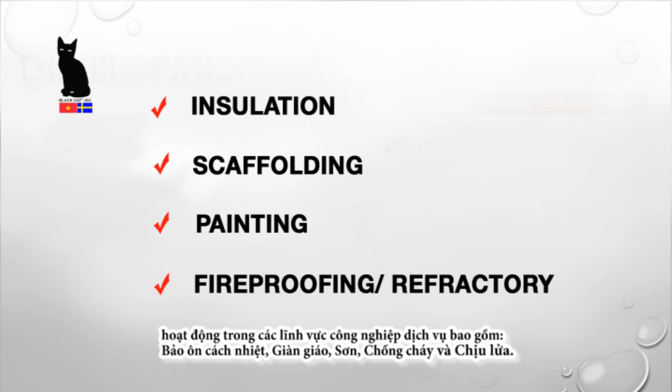Over 5 years of development, Black Cat has become one of Vietnam's leading insulation specialists and served hundreds of clients, with many projects from offshore to onshore, in brewery and food technology, cement plants, thermal power plants, oil and gas, both in Vietnam and overseas.

As a result, we've gotten high evaluation from clients and obtained ISO OHSAS. Up to now, our warehouse has been extended approximately 3 times, and a new branch in Sweden is ongoing.

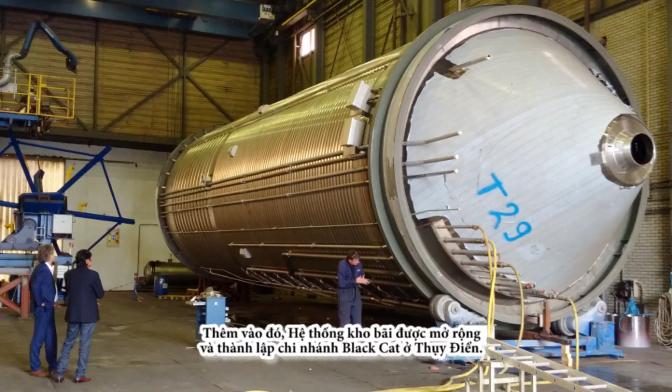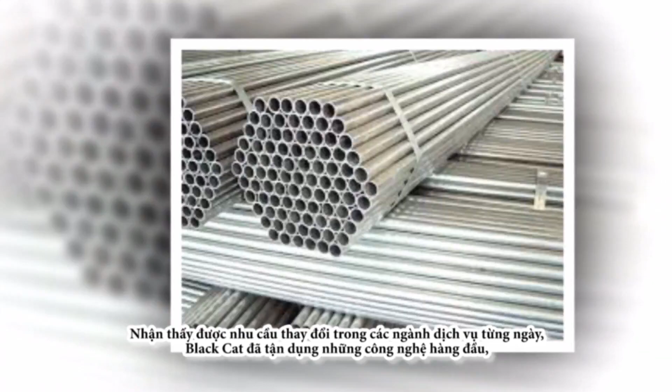To recognize the changing demands of the industrial sector day by day, Black Cat utilizes leading technology, advanced materials, and methods to conform to technical specifications and project requirements. Our work is performed by highly trained and qualified tradesmen. We have the knowledge and experience to build a project the right way, from the small but important features, and provide cost-effective, safe, and quality work without any defect at all.

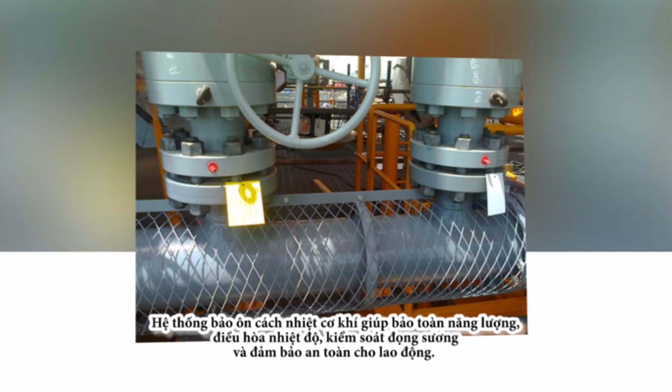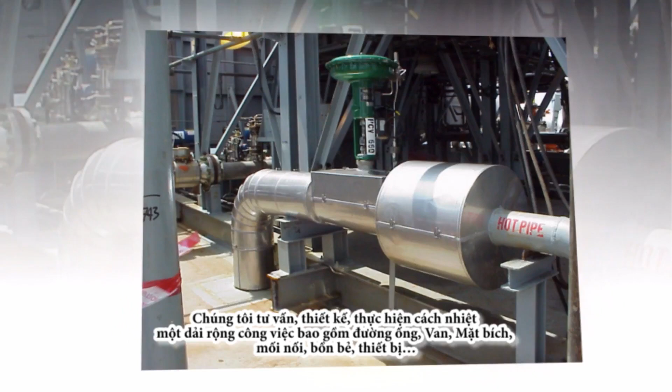For insulation, a full-service mechanical insulation system shall conserve energy, regulate temperature, control condensation, and ensure personal safety for your employees. We consult, design, and execute the installation with a diverse scope of pipe work, valves, flanges, fittings, tanks, vessels, and equipment for easy maintenance and inspection.

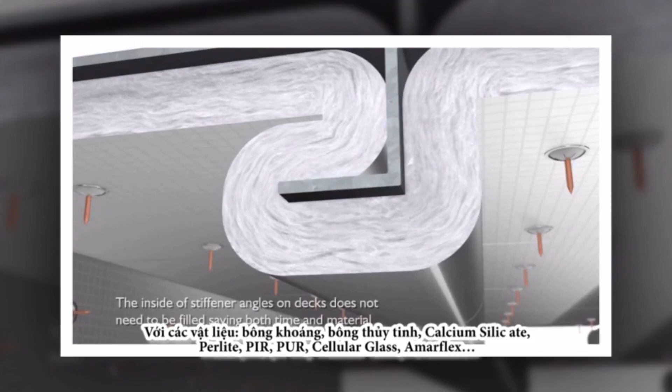With a wide range of materials such as mineral wool, glass wool, ceramic fiber, calcium silicate, perlite, PIR, PUR, cellular glass, Armaflex, and skilled cladding fabrication of sheet metal and fiberglass cloth, we will help you get 10 to 15% less heat loss than usual.

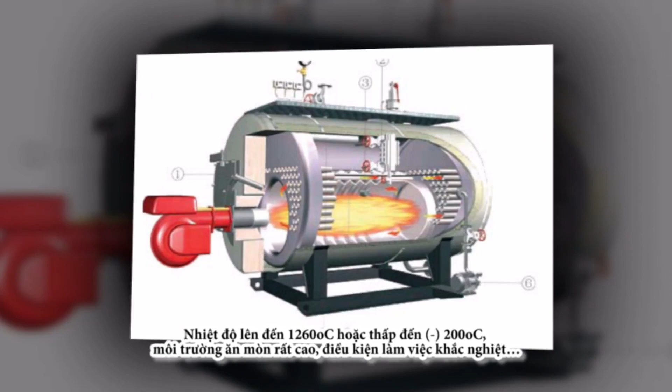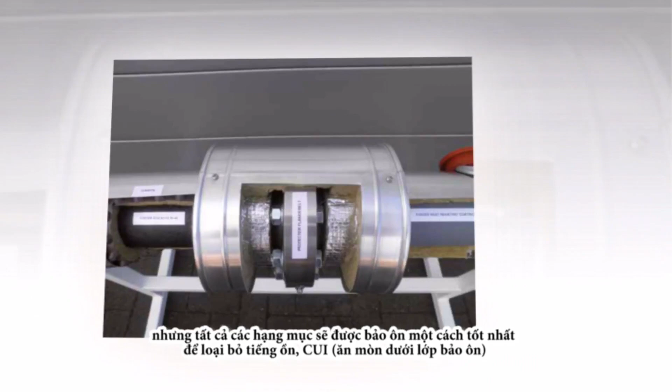At temperatures up to 1260 degrees centigrade or down to minus 200 degrees centigrade, in high corrosion media and harsh working environments, all these components will be insulated to prevent noise, CUI, and let their temperature return exactly to where it must be.

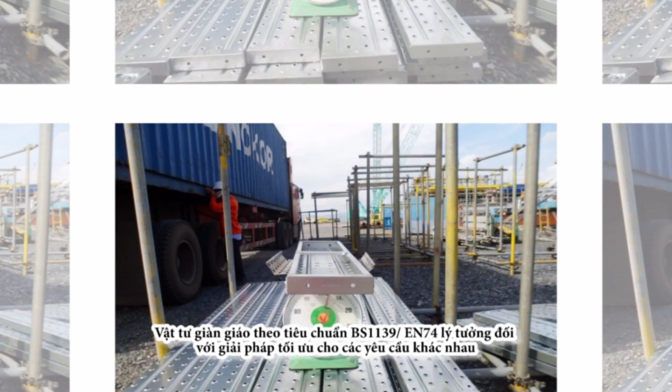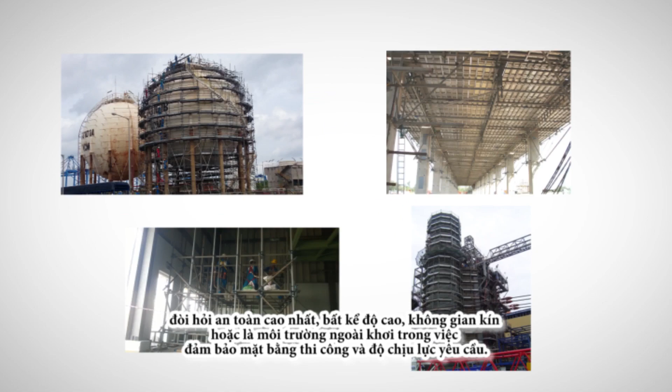For scaffolding, tube and fitting scaffold BS1139/EN74 is ideal for optimum solutions in terms of the highest safety and different requirements, regardless of height, confined working space, or in the offshore marine sector, to ensure easy access and load bearing. Our experienced and trained workforce will help you save time and money.

Cat can design, draw, calculate, and make method statements for scaffolding prior to execution by qualified engineers and professional software. We erect, inspect, and dismantle by strictly controlled procedures complying with international standard EN74.

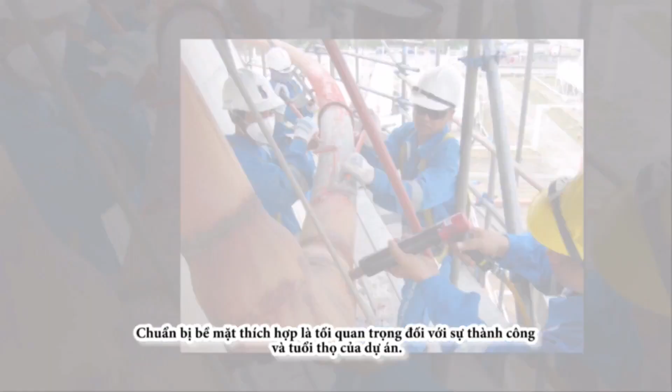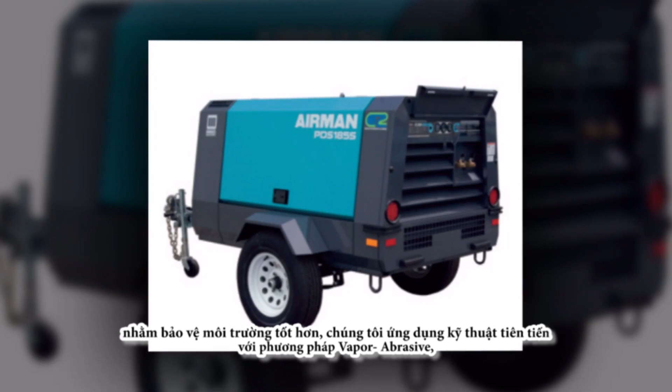For painting and lining, proper surface preparation is critical to the success and longevity of our projects. To better protect the environment, we limit the use of conventional blasting methods like dry and wet blasting. Instead, we apply advanced technique with vapor abrasive blasting, which efficiently combines water and different types of abrasive media that can offer all blasting levels from normal to SA 2.5, reduce dust suppression by up to 97%, and waste less material.

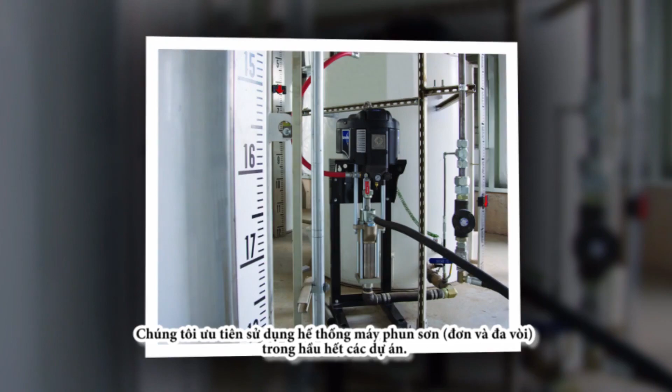High volume spray painting performance, single and plural, is preferable in most painting projects regardless of thickness. Concurrently, traditional brush and roller techniques are sometimes utilized if needed.

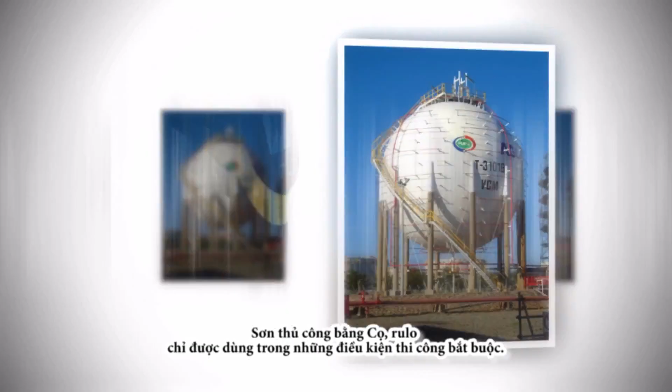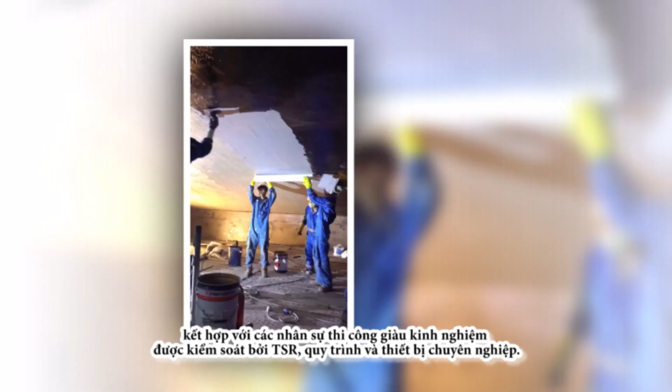All kinds of extremely corrosive acidic media or offshore marine fields with high and fluctuating temperature will be completely treated by specific and typical types of paints like flake lining and rubber lining. Other traditional paints from well-known suppliers such as International Paints, Jotun, Chugoku, and Nippon are also applied. Up to 3,000 microns multi-layer performed and controlled by skilled painters and professional measuring equipment, procedures, and TSR.

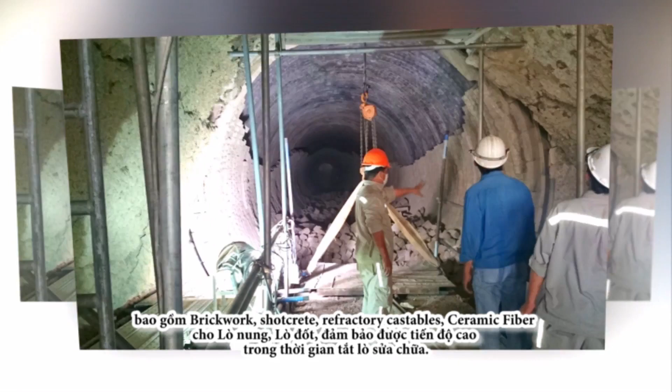For refractory, in shutdown services, we repair and replace strong, durable refractory systems in all types of high temperature materials, including brickwork, shotcrete, refractory castables, and ceramic fiber for furnace facilities and boilers, strictly keeping to the schedule of shutdown time.

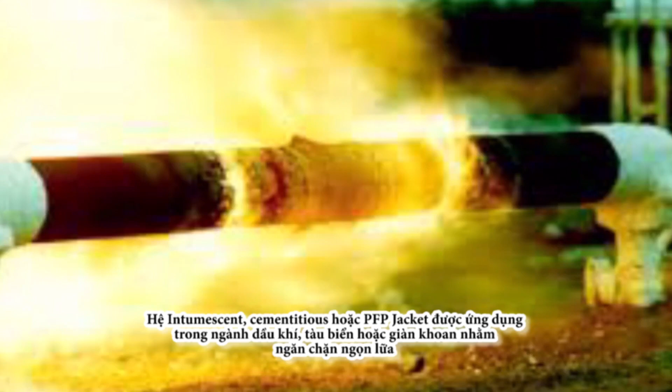For fireproofing, intumescent, cementitious fireproofing, and PFP jacket systems are applied to contain a fire or slow the spread. They are specialized for oil, gas, marine, or offshore sectors. When exposed to fire, the fireproofing layer swells and expands to create a passive barrier to fire.

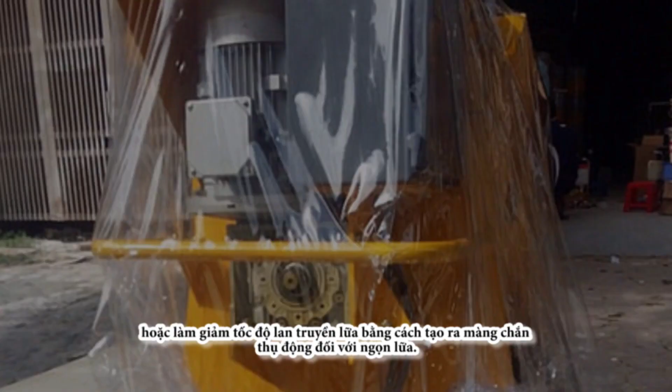Black Cat is a qualified applicator for Thermolag 3000 and Pyrocrete 241, Chartek, Interchar, Firefree, PPG, Jotachar, and Tecnocoat S100. PFP jacket system...

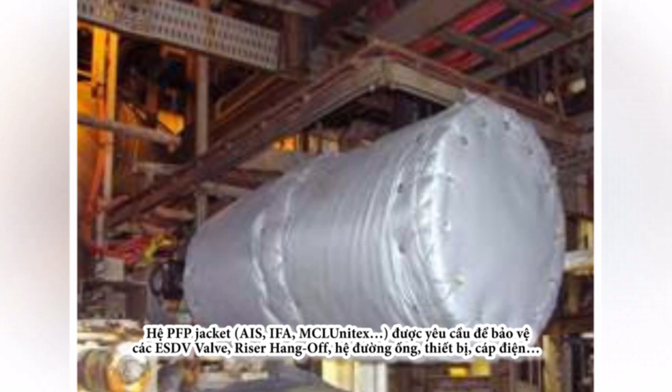AIS-IFA is required to protect ESDV valves, riser hang-offs, piping systems, and equipment. It's very thin, light, easy for handling and installing, as well as meeting regulations on weight handling in the offshore sector.

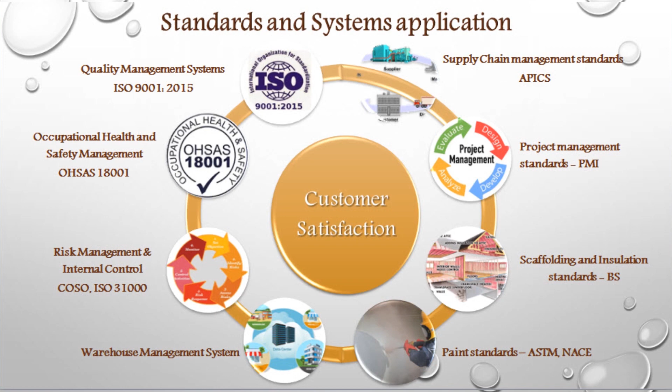By committing to keep improving quality, applying new advanced materials and technology in our services, to enhance knowledge in our services, and provide a chain of consulting, designing, and manufacturing, in order to move beyond simple process and installation and increase surplus value for the services.

Come to Black Cat, and you will be served with the highest safety and quality, effective cost, and sustainable value. Our final goal of development is to improve and increase customer satisfaction. Black Cat: we build quality, safety, and happiness.